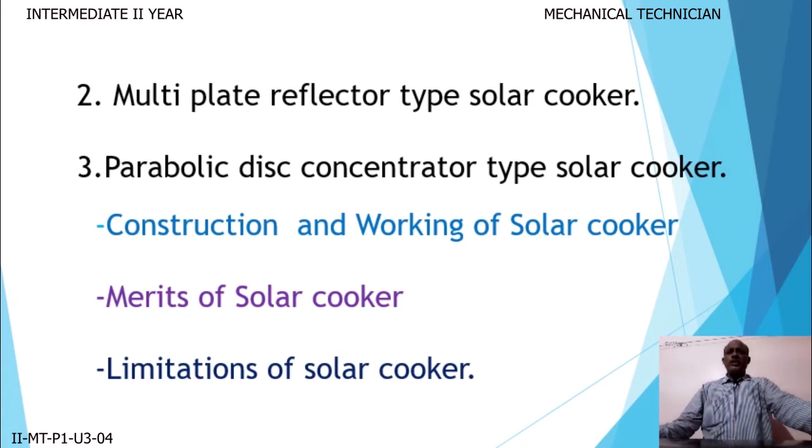Now coming to part 4, today we are going to discuss solar water pumping. Solar energy can also be applied for pumping water for irrigation purposes. Solar water pumping is used to lift water from wells or bore wells for irrigation, that is, for agricultural purposes.

Generally we see conventional pumps which work using electricity. But instead of using electricity, we make use of pumps powered by solar energy, and these are called solar water pumps.

Solar water pumping is used to lift water from wells or bore wells, or even from water storages, for irrigation purposes, and it can be used for cropping the fields.

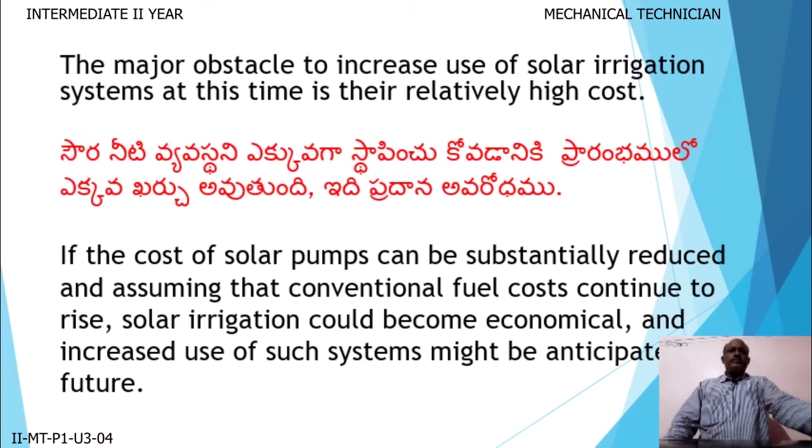The basic system consists of the following components: number one, solar collector; number two, the heat transport system; number three, boiler or heat exchanger; number four, heat engine; number five, condenser.

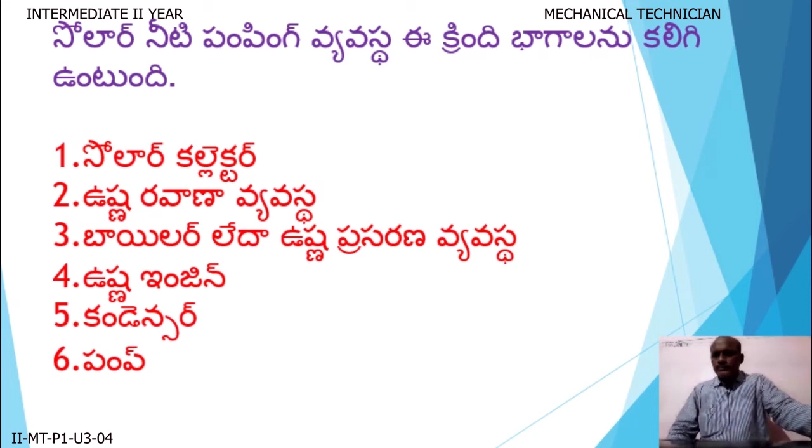The solar pump is not much different from a solar heat engine working in a low temperature cycle. The source of heat is the solar collector, and the sink is the water to be pumped. A typical solar powered water pumping system is shown below.

Coming to the working principle of solar water pumping: the solar water pump working is not much different from the working of a solar heat engine. Here, the solar collector works as a source of heat, whereas the lifting of water works as a sink in this solar heat engine cycle.

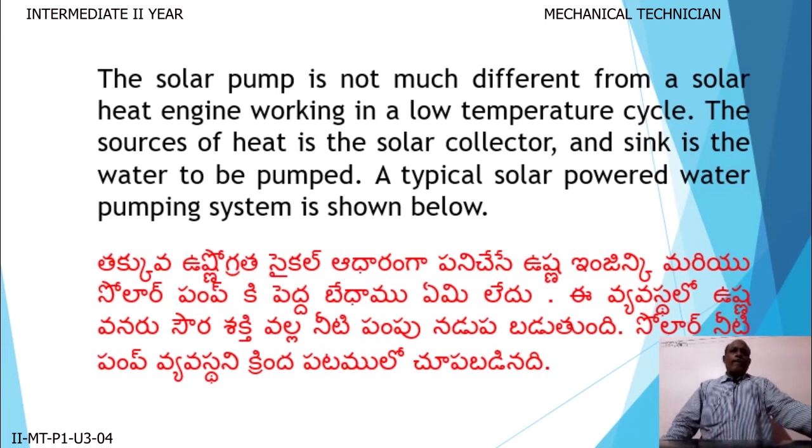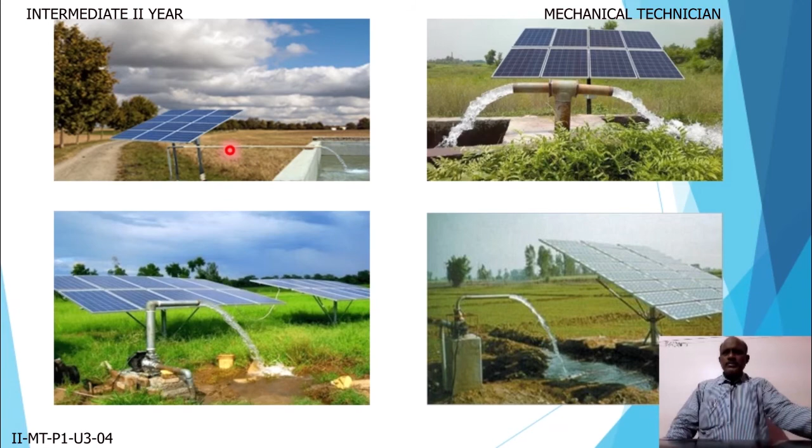It lifts the water from the source to the irrigation needs. Now these are the various solar water pumping setups. We can see the images.

So already I explained in the line diagram how that solar water pump works.

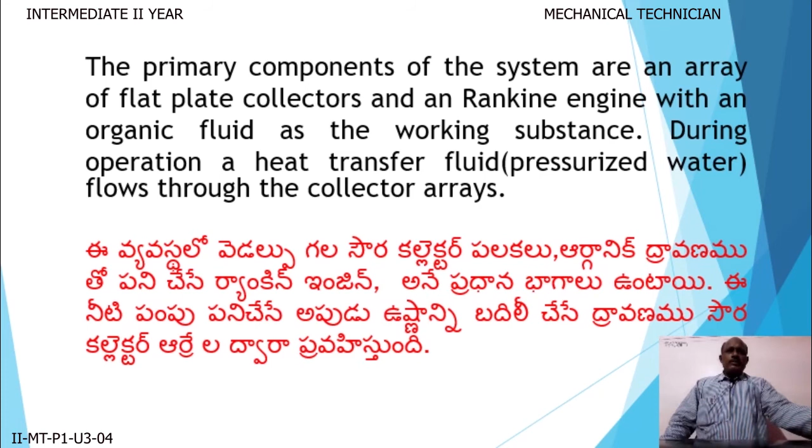So here also the same explanation is there, how the solar water pumping is working, in both English and Telugu. Just you can go through these points.

And this is also there, how the water flows in the collector from the bottom of the boiler to the bottom of the solar collector, and after receiving the heat its density decreases. Because of the difference in densities, the hot water moves upwards as a hot fluid, and then it enters into the boiler. Like that, the circulation of water between the boiler and the solar collector takes place, and that is explained here. Just you go through these points.

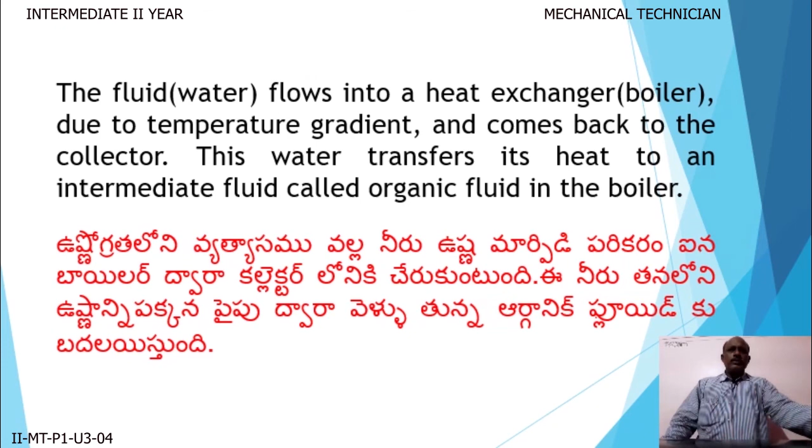So just these are the points, just you read out and you can understand.

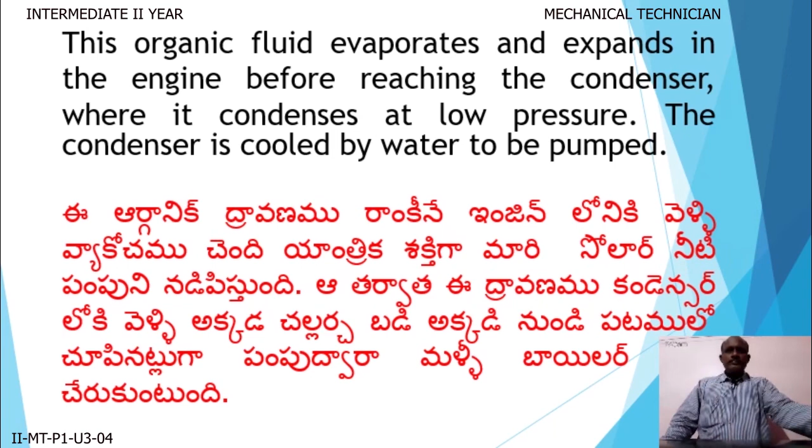And similarly here also it is there. The fluid is then re-injected in the boiler to close the cycle. The expansion engine or Rankine engine is coupled to the pump, and it could of course be coupled to an electric generation.

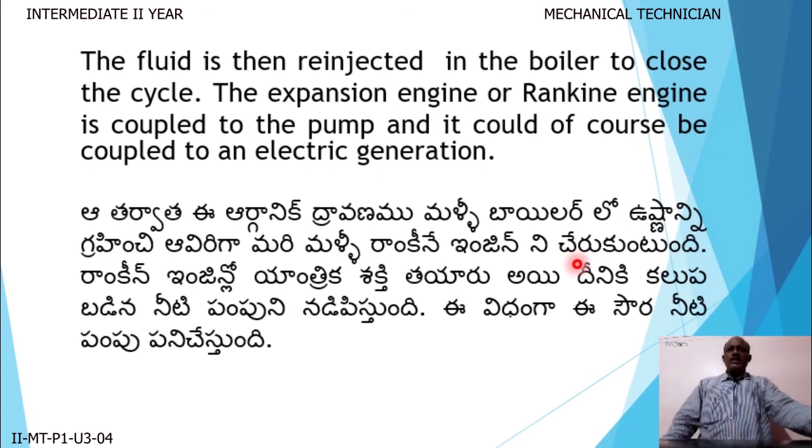So just you go through these points for easy understanding of the working of solar water pumping.

Now, electricity from solar energy. The solar energy also is used to produce electricity. Now, electricity energy is the most convenient form of energy. It is easy to use, transport, control and transform into other forms of energy.